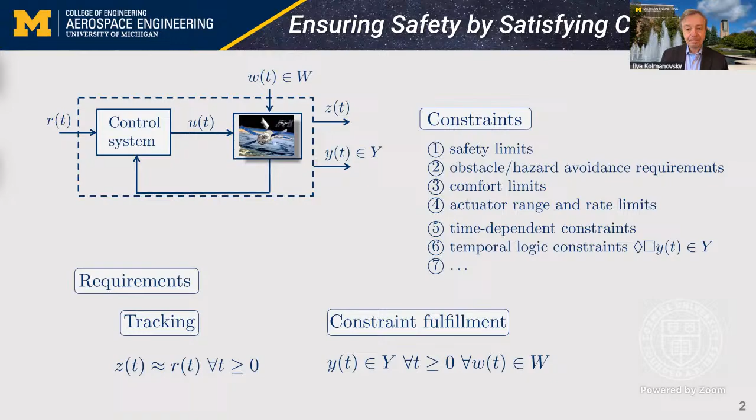When working on constraint control, what we're trying to accomplish is to avoid rollover for cars, trucks, and ships. We'd like to avoid compressor surge in aircraft engines, battery catching fire due to overheating, aircraft disintegrating during flight due to excessive structural loads induced by maneuvers or gusts, or the onset of pilot-induced oscillations due to exceeding actuator range and rate limits.

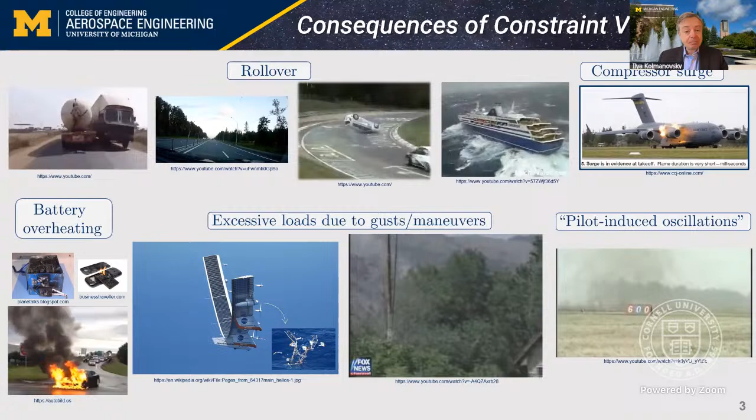So we want to avoid situations like this. How can constraint violation happen? It can happen in a number of different ways.

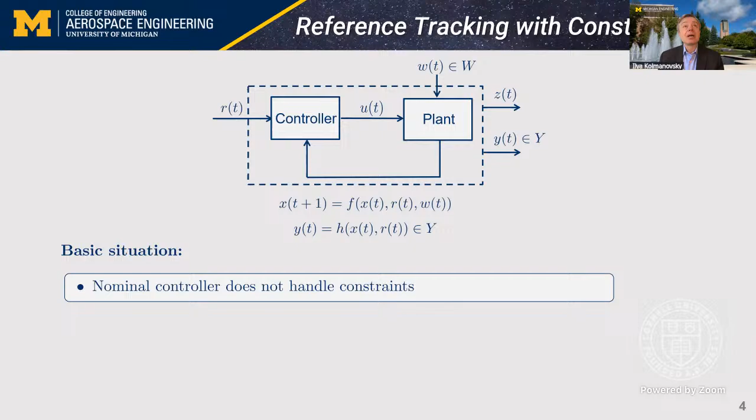One specific situation I've been interested in is when commands are issued to a nominal controller of the system by a human operator or a high-level planning algorithm, and these commands are unknown in advance. If the nominal controller is not designed to handle constraints, these commands can be unsafe, and as the controller responds to them, the constraints could become violated. That's a situation we'd like to try to prevent.

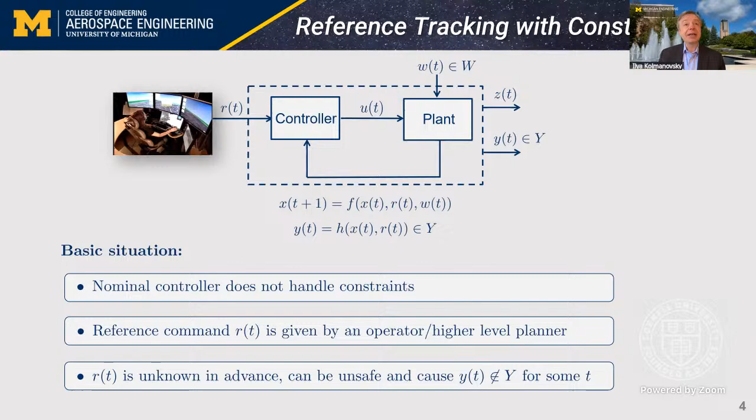Now a basic tool to address this issue is the notion of a safe set. That's something that one of my mentors, Professor Elmer Gilbert at the University of Michigan, introduced to me many years ago, and we have collaborated on extending these ideas to systems with unmeasured set-bounded disturbances, here denoted by W of t. Some of this research still continues to this day in my group.

A safe set, or what is more properly known as the maximum output admissible set, O infinity, is a set of all constant reference commands R of t, as well as initial states x of 0, for which the ensuing output response doesn't violate the constraints for all times, despite unmeasured disturbances or uncertainties W. In our work, we've been concerned about properties of these sets, such as invariance, how to compute and approximate them with suitable subsets, and how to use them in applications.

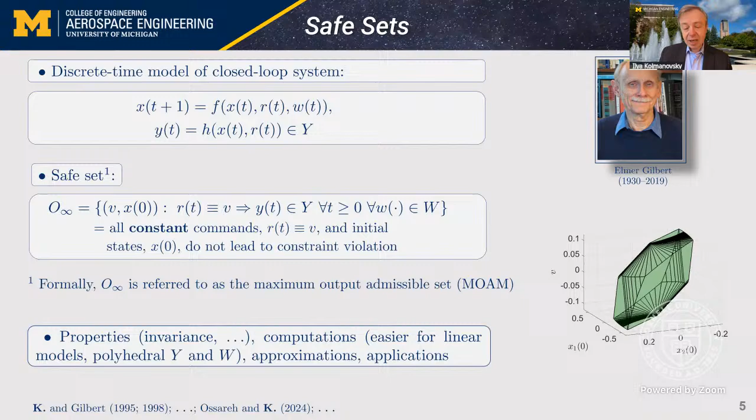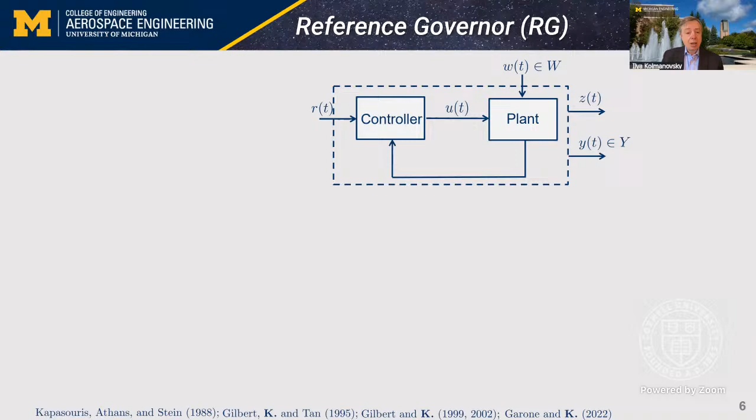One way to utilize safe sets to address the problem I just discussed is to use them for the implementation of what's known as a reference governor. The reference governor, the way to think about it, is a safety filter that minimally modifies unsafe reference commands R of t, which have the potential to induce constraint violation, into safe commands V of t.

To do that, what the reference governor needs to do is maintain the pair consisting of the modified command and a state within a subset of the maximal output admissible set, called P. There are particular reasons for using subsets. At the same time, you try to minimize the difference between the modified command and the original command, because ideally you'd like the safety filter to be inactive and not do anything.

Suboptimal implementations of the reference governor, such as a scalar reference governor, can be made computationally very fast and simple to implement. In the scalar case, the output of the reference governor is a linear interpolation between its previous output and the current reference command. Kappa is the adjustable interpolating factor, or bandwidth parameter. It takes values between 0 and 1, and you try to maximize it subject to the safety constraint. So this can be made very, very fast.

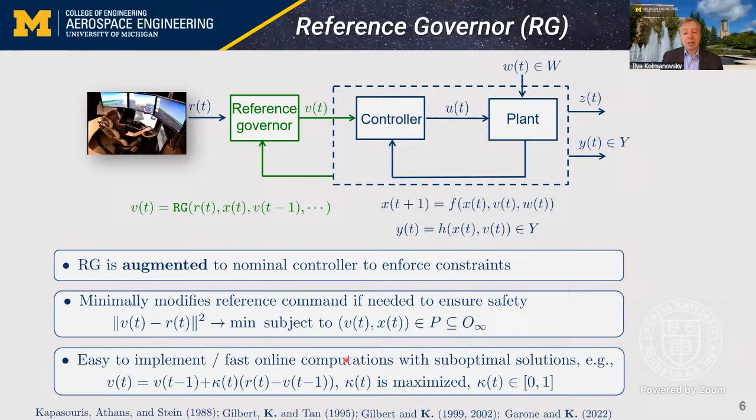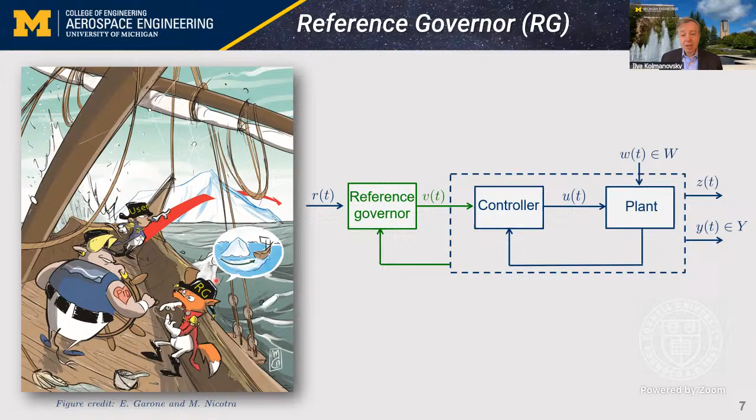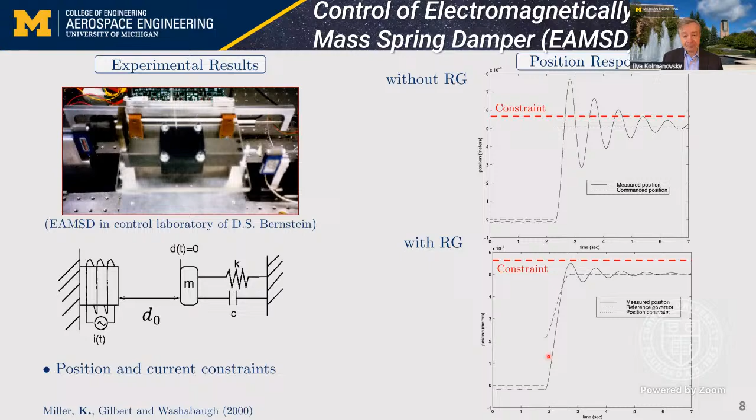You know you're getting older when there's an article in IEEE Control Systems magazine written about your paper in a rubric from 25 years ago. In this case it was about the paper reporting experimental results of the reference governor implementation for the electromagnetically actuated mass spring damper system I just talked about. Of course, we've learned a few things about reference governors since that time, and I'd like to summarize some of these ideas.

The key ingredient in construction of the reference governor is this set P. It turns out there is much flexibility in how this safe subset can be chosen. In particular, it has to be a subset of the maximal set, which ensures safety, but it does not need to be invariant. Invariance is really not required for this safe subset—it has to satisfy a weaker property, what we call strong returnability.

That is, if you start with a state inside this set and a reference inside this set, and apply the reference as a constant, the trajectory of the system might leave this set, but there will be some future time instant t prime where the trajectory passes through the interior of that set. Typically, we look for these subsets as zero sublevel sets of some continuous function, v tilde.

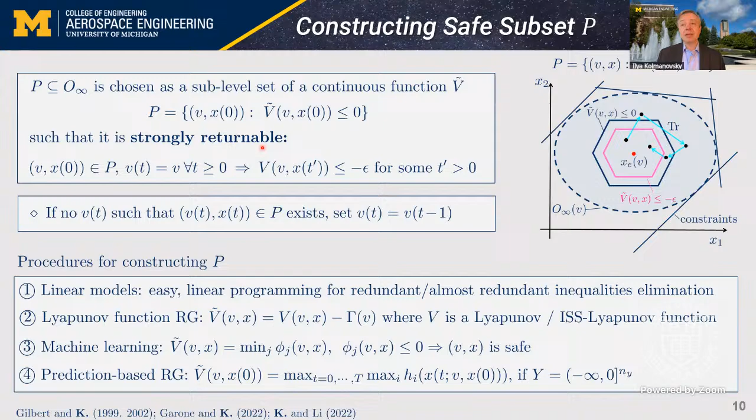Finally, you could avoid explicit construction of this set P altogether, and, like in model predictive control, use online prediction—basically an implicit characterization based on online prediction to define the function v tilde and this subset P.

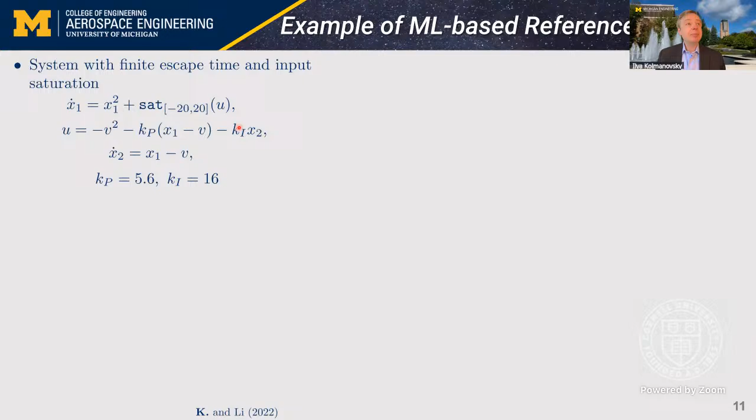Here's an example of a second order nonlinear system in continuous time, which can have a finite escape time due to this x1 squared term. The controller is proportional integral type. There is also saturation on the control input, and there is also a state constraint.

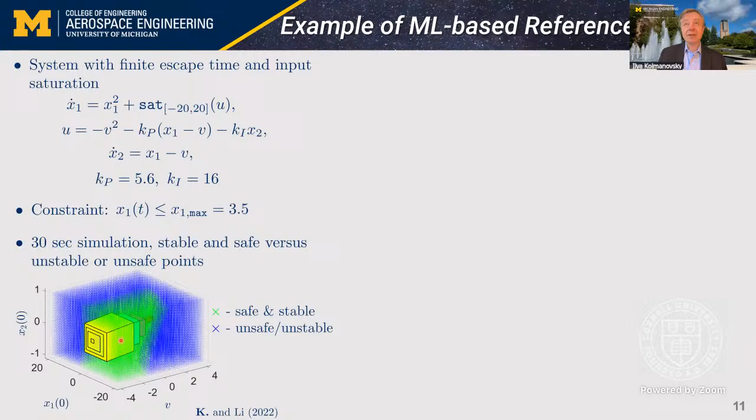To implement the reference governor, you can simulate this system for different pairs of reference command and states. Blue points are unsafe or unstable, and green points are safe and stable. You could fit a very simple classifier consisting of a union of 4 boxes into this green area. This defines the function v tilde, as shown here on the slide.

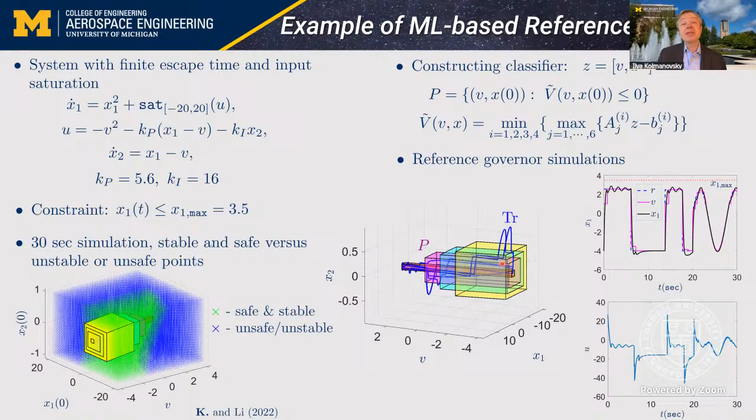That's enough to implement the reference governor. In particular, here we have this type of implementation working quite nicely, keeping the system away from violating the position constraint, satisfying input constraints, and avoiding the finite escape time. Note that this set P is not invariant, so trajectories can leave it and come back to it, but the safety is still preserved.

In fact, not only is the invariance of this safe subset P not needed, but when searching for the modified reference V, which should be as close as possible to our original command R of t, the exact solution of the optimization problem is not required. Any value V prime which satisfies an easy to check acceptance criterion can be used.

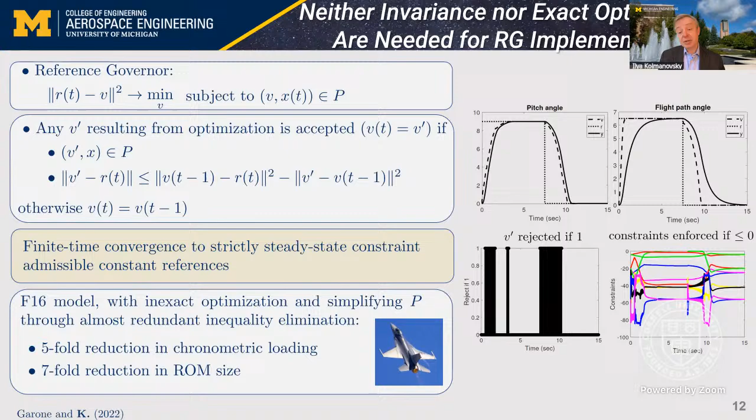So by exploiting simplified sets P, as well as inexact solutions to the optimization problem, one is able to obtain very simple implementations, from the perspective of chronometric loading and ROM size, that keep the system safe. Also, through this mechanism, reference governors can handle uncertainty in availability of computational resources if that becomes an issue.

So if you'd like to know a bit more about some of these approaches, my colleagues and I have written a couple of survey articles on reference governors. They discuss the underlying theory, over 20 extensions of the basic reference governor scheme I spoke about, and many applications in different domains. This work is really by multiple groups worldwide and multiple researchers who worked on these topics.

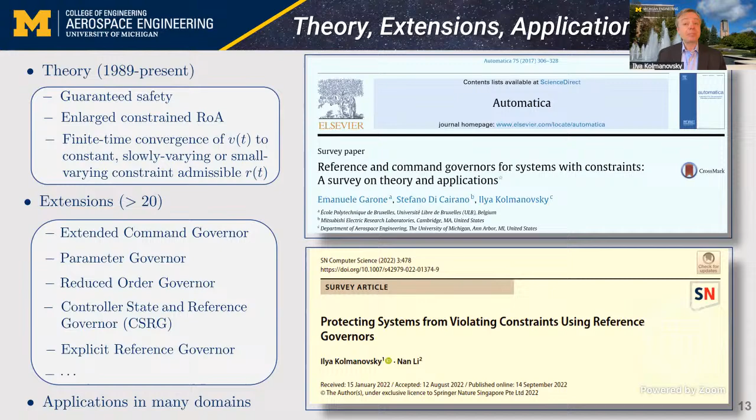I just wanted to mention very briefly a couple of recent applications of reference governors that we looked at not so long ago, and one of them is for vehicle lane keeping. So what you're trying to do is to keep the vehicle within the lane boundaries as it might perform some kind of lateral maneuvers. The idea here is to apply the reference governor to modify a lateral command for the vehicle where it wants to be in a lane.

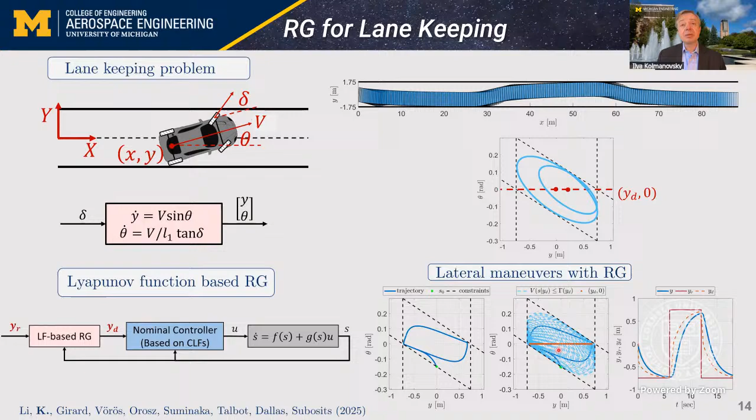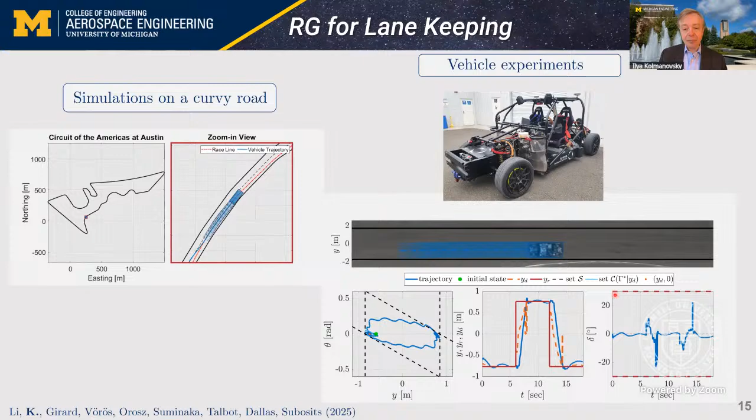Just to show briefly another application, we've looked at the use of these ideas in spacecraft applications, in particular for spacecraft rendezvous and docking maneuvers. One way to implement the reference governor in these applications is to have it output a virtual position of the chief spacecraft to which you are trying to dock. So instead of commanding the deputy spacecraft to approach the chief spacecraft, you command it to approach a virtual chief spacecraft, and then the reference governor gradually brings this virtual chief spacecraft to the real chief spacecraft.

How do you generate the position of the virtual chief spacecraft? One way to do it is to look at the trajectory of the orbit of the chief spacecraft and time shift it. For that reason, this reference governor is called a time shift governor, because we command the time shifted position of the chief and then gradually eliminate this time shift from the system.

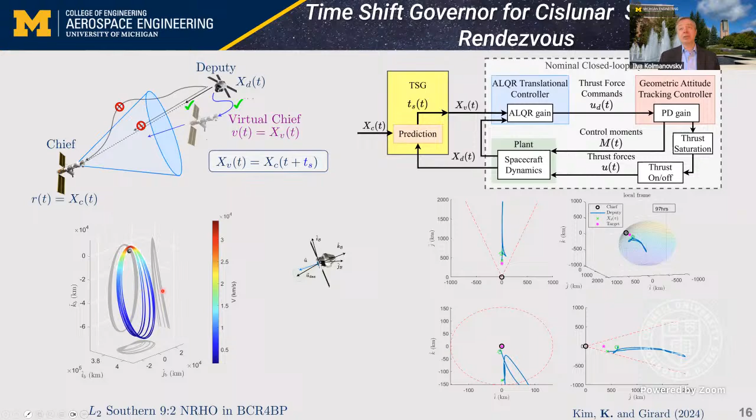Okay, so hopefully this is an introduction to reference governors.

One of the recent areas of interest in my group was how to develop reference governors for systems which have large uncertainty in dynamics. This uncertainty could come in dynamics, in operating environment, in constraints, and even in available computational resources. I've also been interested in cases where characterization of this uncertainty is poor, and less specific than in traditional robust and stochastic constraint control.

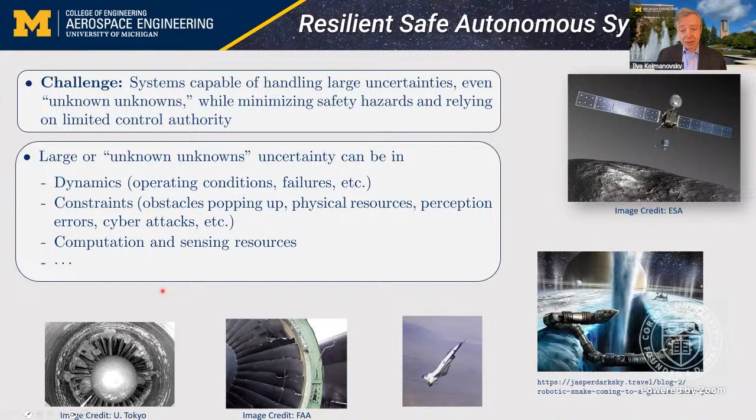We think that such reference governors can play a role in achieving resilient autonomy, in particular for aerospace applications. So how one can approach some of these systems with large uncertainty, and clearly closer integration of constraint control and adaptive control can play a role in addressing such problems.

Recently with Professor Pan Zhao and Naira Hovakimyan, we looked at integration of reference governors with L1 adaptive control. The basic idea is that the L1 adaptive control compensates for the uncertainty, so that from the perspective of the reference governor, the system behaves or matches the prescribed nominal model. So the reference governor really doesn't know much about uncertainty because the adaptive controller compensates for it.

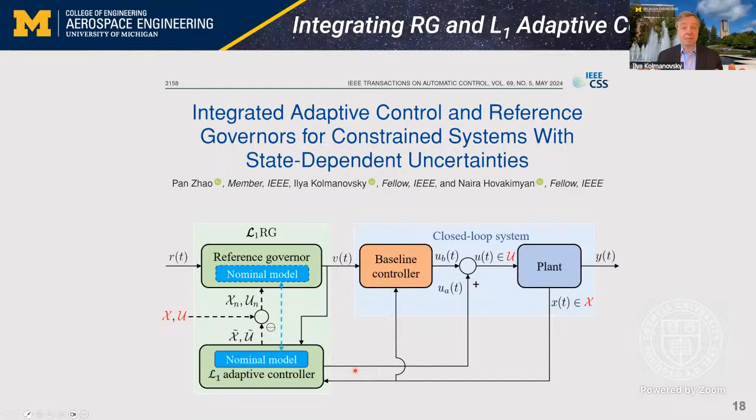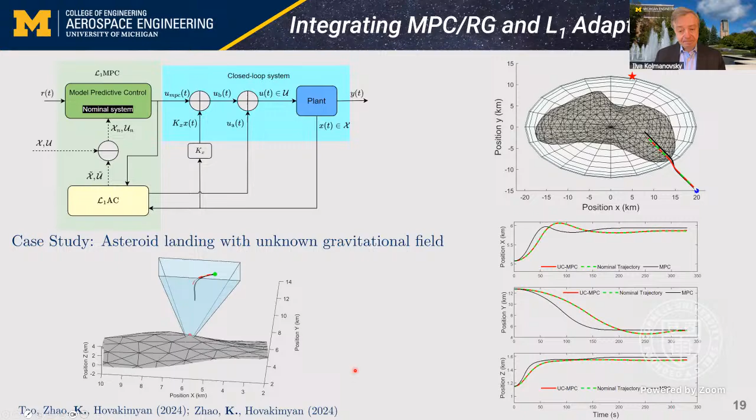Now, here's another approach, how we can integrate learning into reference governor. Suppose we have a system that underwent a change. For example, we had a truck, and that truck has been loaded, so its center of gravity has changed. Maybe we had an aircraft and a portion of the wing of the aircraft has fallen off, a more extreme scenario.

Let's suppose that somehow the system is stable with the nominal controller, but we are not sure which commands are safe and which can cause constraint violation. So what can we do in such case? What we can do is take the system to the side and experiment with it, applying different piecewise constant command profiles. We can see how the system responds, and we can try to estimate from those data a safe subset P that we need for the implementation of the reference governor.

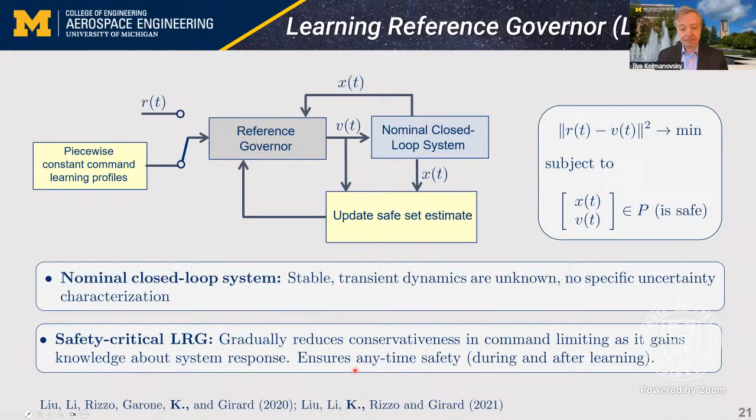The idea would be that as learning proceeds, the conservatism in limiting the reference command will be reduced as the reference governor gains more knowledge about the system response. Of course, we are interested in ensuring anytime safety with such approaches, both during the learning phase and once learning has been completed. Now, how to actually design and implement such a safety critical reference governor?

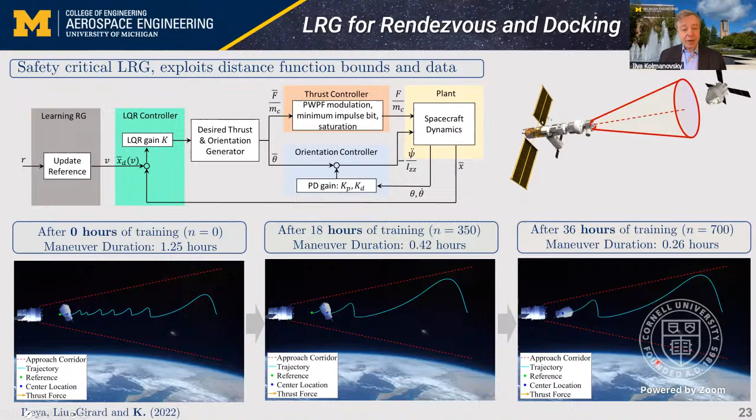Here's a safety-critical learning reference governor developed using these ideas, applied to spacecraft docking maneuvers. As learning proceeds, the maneuver becomes more aggressive and shorter in time duration. So as we learn more, the maneuver lasts less time and approaches closer to the constraint boundary, shown here by these dashed red lines, which represent a line-of-sight cone constraint that we worry about.

Here's another example where we apply a learning reference governor to rollover avoidance, done for a truck. This truck has been loaded or modified in some way in the field, so the center of gravity has changed, and if it proceeds on the mission without a reference governor, it could roll over. So what we can do is let the learning reference governor modify the steering angle and enforce the constraint on load transfer ratio to prevent the rollover.

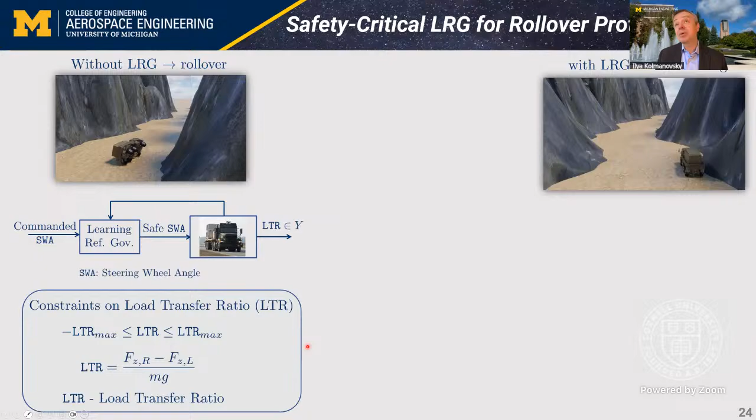Before learning, when we just operate with a priori bounds that are very conservative, the reference governor is very conservative, and as a result the vehicle is not able to follow the desired maneuver during the mission.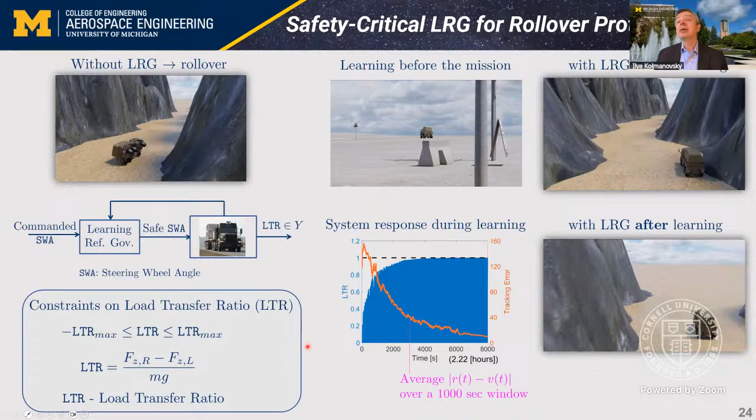What we can do is take this vehicle to the side and experiment a bit, applying different steering commands. After learning for a while, we're now able to do significantly more aggressive maneuvers, and in fact able to complete our original mission and perform the maneuver safely without violating the constraints.

I won't talk about details, but you can make this scenario a bit more challenging, assuming you have a vehicle with fuel slosh. The dynamics are more complicated, but through learning you can also enforce the constraints on load transfer ratio and prevent such a truck from rolling over.

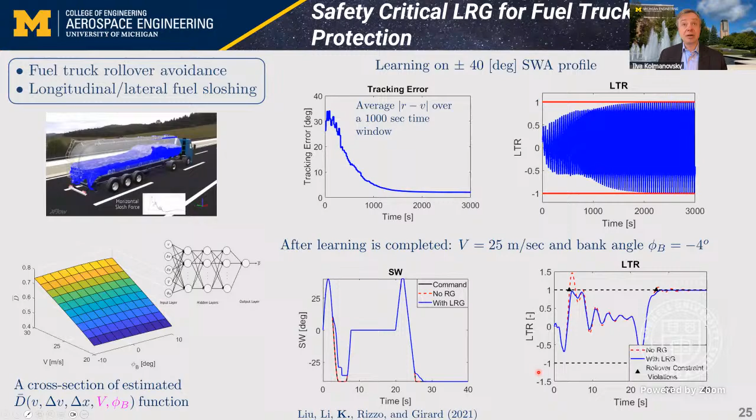Now, one of the limitations of the learning reference governor as I've just described is relatively slow learning. It takes multiple experiments to collect enough data to characterize the subset P that we need. So more recently, we've looked at ways of addressing this.

Conventionally, when collecting the data set, for each step applied to the system we record the state at the beginning of the step, x of t, then the reference v of t, and then the peak. So one step would yield basically one data point. But of course, all states as you move along the trajectory before the peak occurs are going to have the same peak. So in fact, from a single trajectory, you can easily collect multiple state-reference-command-and-peak triples, and a single step yields multiple data points.

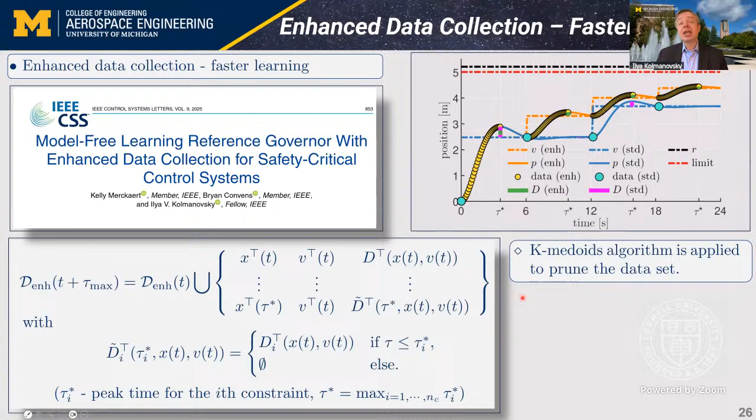This is what we call enhanced data collection, and now we collect all the data using this idea. The data set grows quite large, but we can apply data pruning algorithms to eliminate some of the data points and keep it within the memory size we have available.

Here's an example of a spacecraft with a flexible appendage, where as you command reorientation to the spacecraft, you want to keep the orientation, appendage deflections, and control input within the prescribed limits.

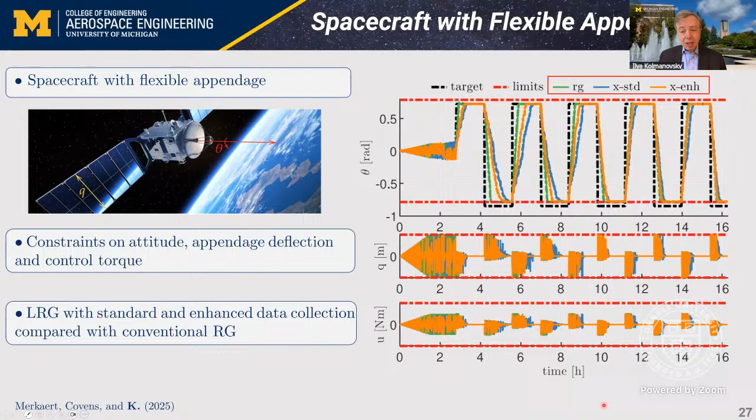Another recent extension is to the case where this learning reference governor only uses output measurements rather than full state. This extension is important if one wishes to apply learning reference governor directly to black box systems where you don't know the states but can take certain sensor measurements. The trick is to use delayed values of the output as a surrogate for the state vector, and then proceed with the rest of the construction using this trick. The details are in the paper I've just shown.

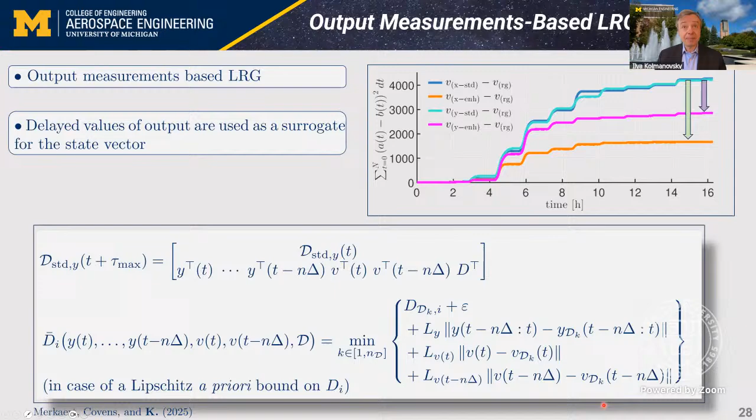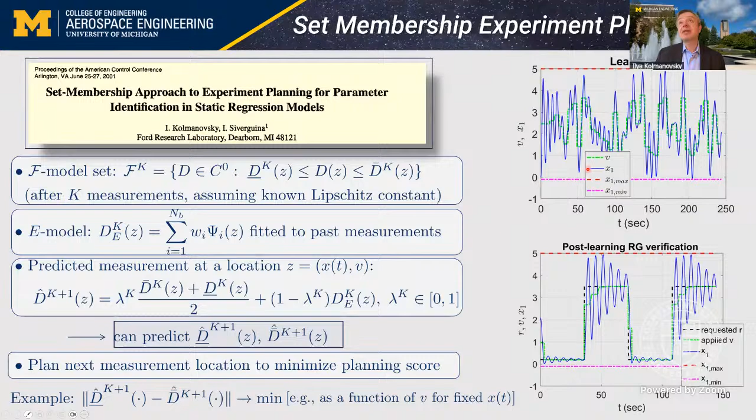Another opportunity is to optimize the sequence of steps applied to the system—the actual sequence of step responses we go through. This is an experiment planning problem, and there are different techniques you can employ. Interestingly, we looked back 25 years ago and found a paper we wrote on set membership experiment planning for Lipschitz models. We think this learning reference governor setting nicely fits into this framework, and some of our initial simulation results seem quite promising in terms of designing exactly the sequence of steps we have to go through to learn faster.

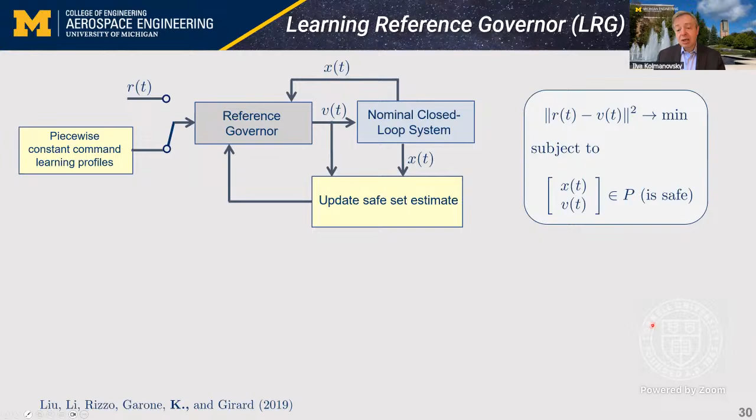This is the safety critical learning reference governor I spoke about. I wanted to briefly mention a non-safety critical version as well. It operates a bit differently: it starts with no or little command limiting, then tightens a safe set in response to constraint violations during learning. So this learning reference governor does violate constraints during learning—in fact, it learns from constraint violation. It's not going to be safe during the learning phase, but hopefully after learning is completed, it's safe or close to being safe.

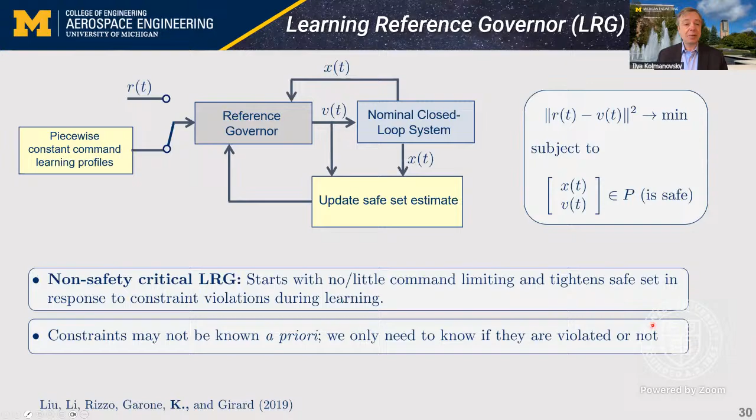Interestingly, in this case, constraints may not be known a priori—we only need to know if they are violated or not. Just very briefly, to show one example: these are truck simulations, and what we are trying to do is have the vehicle learn not to roll over with this non-safety critical learning reference governor.

Each time a constraint violation happens on load transfer ratio, we tighten the safe set description—essentially we reduce this gamma of V. There's a specific way we do it so that after multiple learning iterations, we are able to avoid rollover. Of course, in practice, if you use such an approach, you have to make sure constraint violations are not catastrophic. For example, in a real vehicle application, you might add sidebars to the vehicle to ensure actual rollover doesn't happen.

For this type of non-safety critical LRG, you'd deploy it or have it learn in the virtual world rather than the actual physical world.

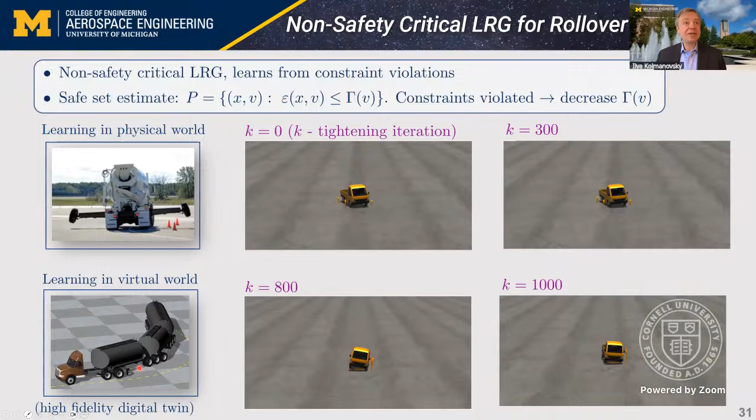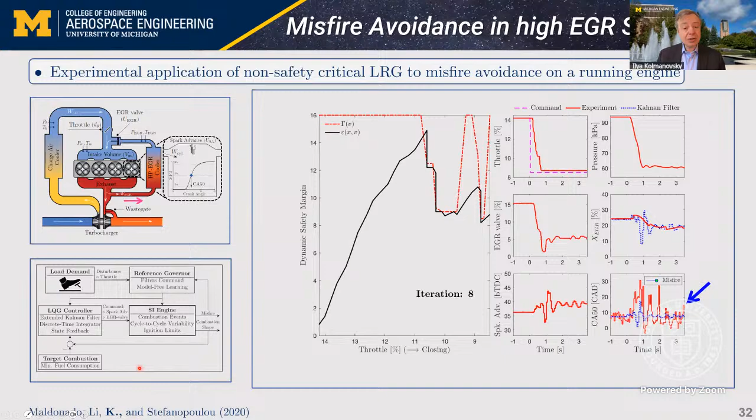We've actually tested such schemes experimentally, in joint work with Professor Anna Stefanopoulou at Michigan and our students. In that case, we had a non-safety critical version of learning reference governor on a running gasoline engine with a high exhaust gas recirculation rate—essential to reduce oxides of nitrogen emissions. Here, the learning reference governor learns to slow down throttle closure in such a way as to leave enough air in the intake for acceptable combustion to take place, essentially avoiding engine misfires. That was an interesting experimental application.

I'd like now to shift the discussion a bit and talk about what I would call constrained learning. Traditionally, when we deal with uncertain systems, we assume dynamics or environment are unknown, but constraints themselves are specified—given to us by some known functions or known limits. Turns out that's not quite true in applications, as in some cases constraints themselves are not a priori characterized, at least functionally. So these constraints also have to be learned.

We encountered such a situation about 25 years ago when working on stratified charge combustion engines, where fuel is directly injected into the combustion chamber and has to swirl around and reach the location of the spark exactly at the right moment for acceptable combustion to proceed.

There is an intricate relation between injection timing, when you inject fuel, and spark timing, when you actually start the flame. So there are constraints, and these constraints depend on air-fuel ratio of the engine, exhaust gas recirculation (EGR) rate, and rail pressure. It's actually quite a complex function. At that time, we looked at support vector machine learning to determine the constraint boundaries from the data and obtain a functional description of those constraints.

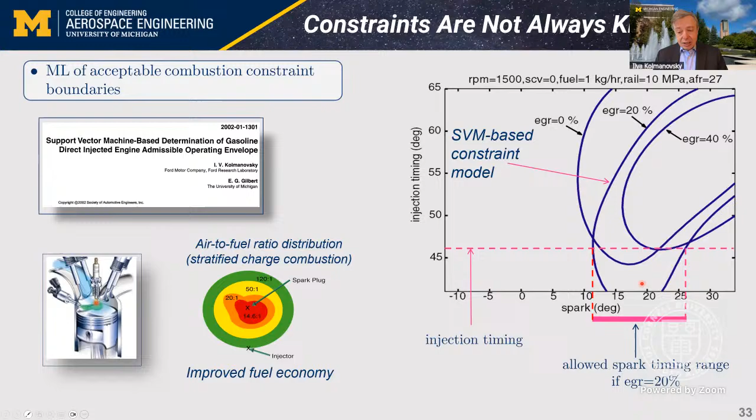It turns out we came back to the same kind of issues more recently, realizing that even if you take a simple two-link robotic manipulator and throw a couple of obstacles into a workspace, if you look at configuration variables, which are joint angles of this robot, the collision-free space actually has quite complex geometry, and the constraints are quite complicated and not that easy to specify in general.

So what you can do is throw a few points in and sample, see whether these points lie in collision-free space or in parts of the space where you have collisions, and train support vector machine classifiers to provide a functional description of the constraints. You can then use this for constraint control, for example in model predictive control and in reference governor design as well.

What's very interesting is that we found that for a number of kernels in support vector machines, in particular the Gaussian RBF kernel, the MPC problem you end up with reduces to what's known in the literature as a difference of convex, or DC, programming problem, for which there are tailored solvers. So it's a known class of optimization problems for which tailored and computationally efficient solvers exist.

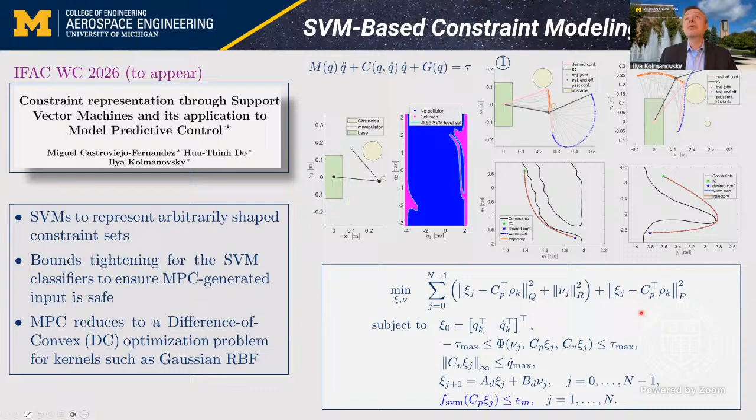With that, you're able to solve MPC problems and perform various maneuvers with this manipulator, where you have to move it, for example, from the stretched position to a more folded position, while avoiding obstacle hits and so on. So there are some interesting applications where you want to learn the constraints offline.

Now, the other class of situations where constraints are not known is where you need to do online constraint learning. For example, you might have a robot that enters an area, perhaps a room where the walls are not known precisely and have not been a priori characterized. Perhaps you have some kind of functional description of them, parameterized by a few parameters.

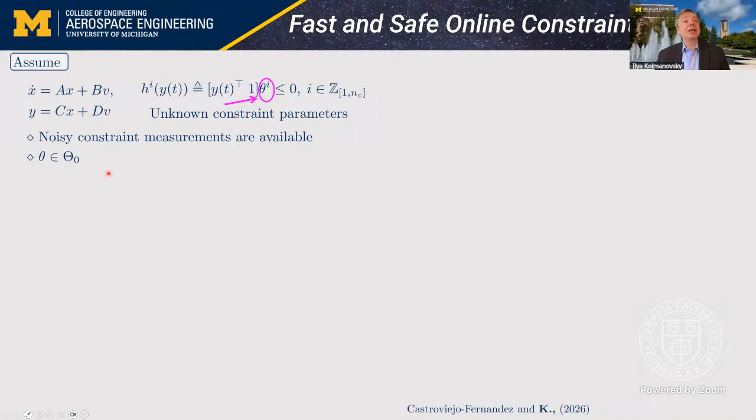So what you try to do is operate safely within that area, within that room, while relying on measurements of the constraints to try to identify what the parameters in the constraint descriptions are. You need to know some a priori bounds on where the parameters can be. Then in terms of identification of the constraints, there's really one type of approach you can use, which is a set membership-based approach.

Experiment planning, because you want to plan your position within this room safely but also optimally, to enhance the data collection and try to reduce the uncertainty in the parameter set you're trying to identify. Then the reference governor at each epoch ensures that whatever reference you command is safe with respect to your current estimate of the plausible parameter set.

But as learning progresses, the size of this theta sub k, the set of plausible parameters, reduces, and therefore the set of feasible reference commands that you can follow expands. So initially you could be very conservative in terms of which maneuvers you can perform, and then once you proceed with learning, you can become significantly more aggressive and explore more space.

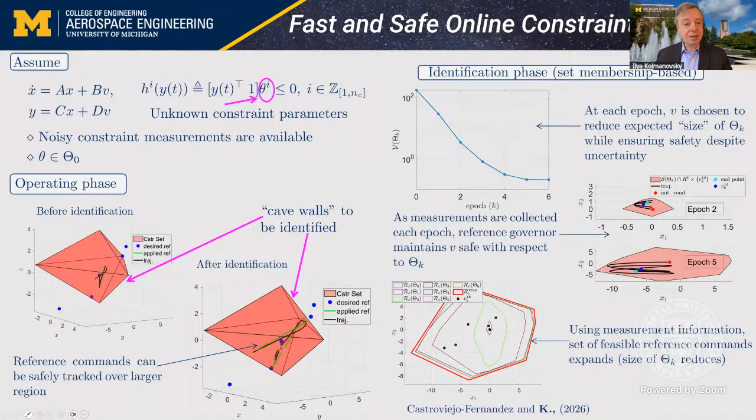If I have a few more minutes, I'd like to tell you a little bit about the model predictive control research going on in my group, moving away from reference governors and thinking about more general schemes for dealing with constraints.

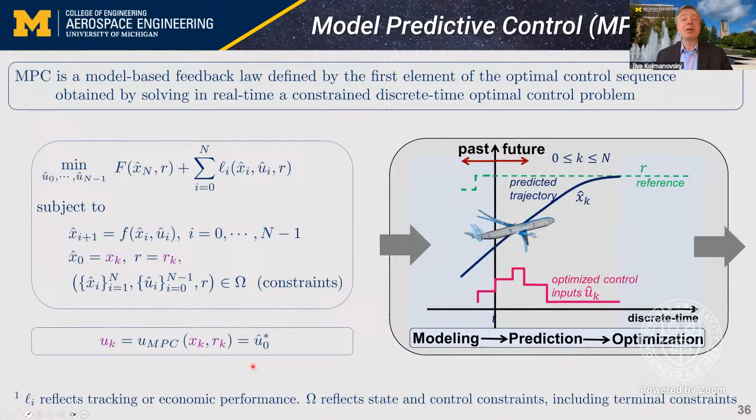As a reminder, in MPC we tend to solve an optimization problem, typically a trajectory optimization problem subject to constraints. We use the first element of the optimal control sequence for control, and then we recompute the solution. Now, of course, one of the key challenges, or Achilles' heel, of MPC is the heavy computations involved.

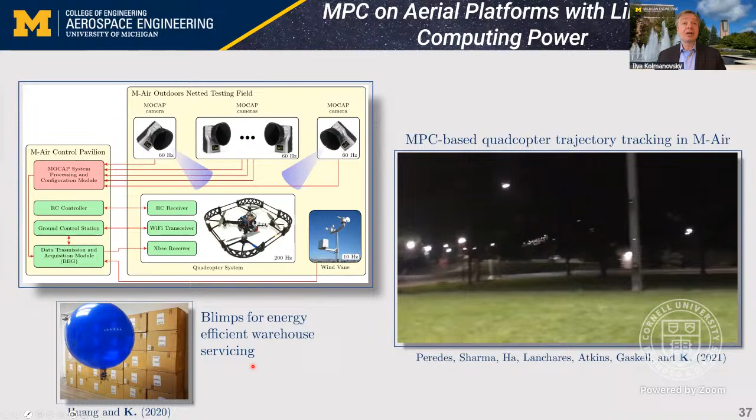If you try to implement MPC controllers on, for example, board of quadcopters or small aerial vehicles, you realize we've been trying to think of ways to augment reference governor type schemes with model predictive controllers to have computationally simple, safe, and effective solutions. A couple of ideas we came up with: one is what we call the multi-fidelity reference governor MPC scheme.

The idea here is that MPC and reference governors use different fidelity models. MPC uses a low-order, disturbance-free, typically linear model, and only enforces input constraints, so its trajectory optimization problem is very simple. The reference governor, on the other hand, uses a high-fidelity, nonlinear model. It also uses disturbance bounds for uncertainty, predicts trajectories, and decides on modified reference safety. It enforces state constraints. So MPC does simple optimization, and the reference governor validates the trajectories generated by MPC and decides if it can advance to them or not.

That's the setting we've studied, and some of the theoretical details are in our papers. Here's an example where we're trying to dock to a rotating spacecraft. The MPC uses a low-order linearized model with 12 states, and the reference governor is able to use a high-fidelity model with 20 states that accounts for rotational dynamics in addition to translational dynamics, and that model is nonlinear.

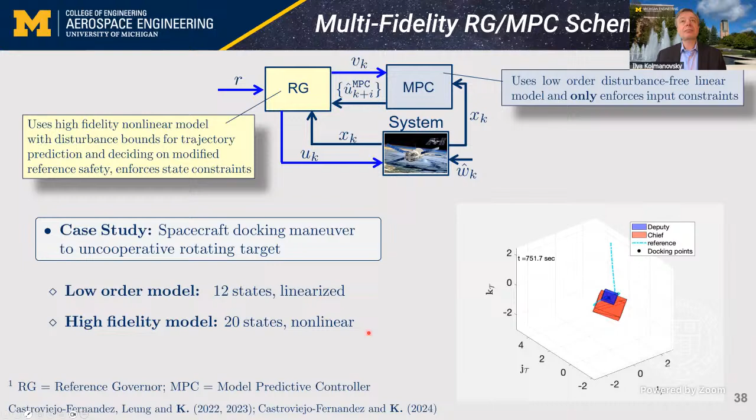Another idea we looked at is what we call the computational governor. This idea came from looking at situations where the MPC solver needs a lot of iterations to converge. If the system you're controlling with model predictive control is close to steady state and you use warm starting, then the MPC solution from the previous iteration isn't so different from the optimal solution, and typically one iteration per time step is sufficient for convergence.

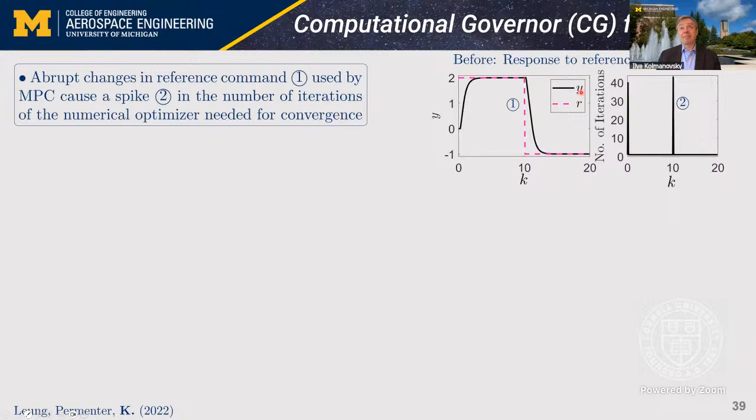The spike in the number of iterations, which you see here on the plot, occurs when the problem data changes—for example, when there's a drastic change in the reference command R for Y. So the idea is pretty clear: instead of applying this pink step, you use some form of reference governor to replace it with a smaller step and perhaps a ramp. If you do it the right way, maybe you could achieve convergence of the optimizer within one iteration.

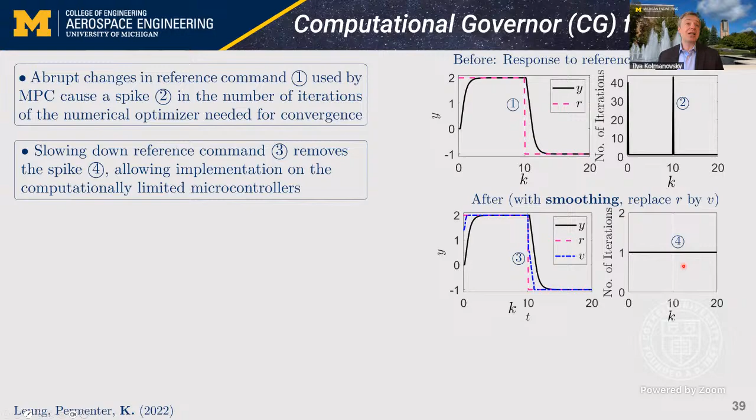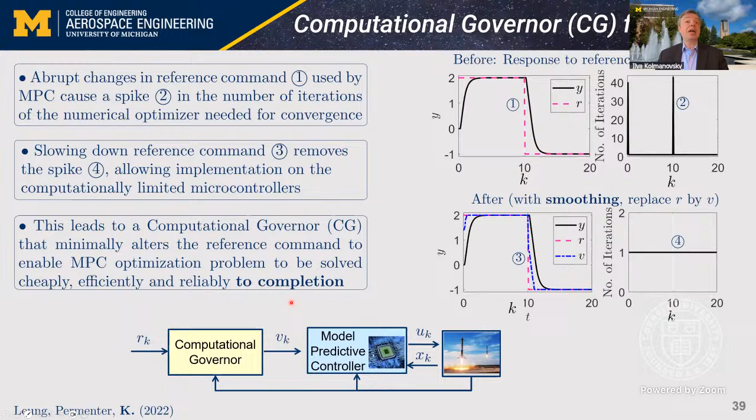That's precisely the idea of the computational governor: it minimally alters the reference command to enable the MPC optimization problem to be solved cheaply, efficiently, and reliably to completion. I won't go through all the details, but I'll mention this reference governor—the computational governor—is a scalar reference governor, but the constraint it enforces doesn't exist in the physical domain, but within the optimization algorithm. There's a Newton step in the interior point method we use to solve the underlying quadratic programming problem, and we try to limit that step to a value of 1 in terms of infinity norm.

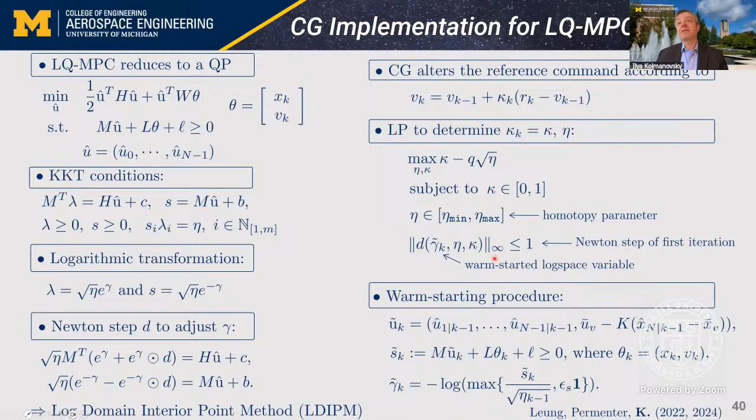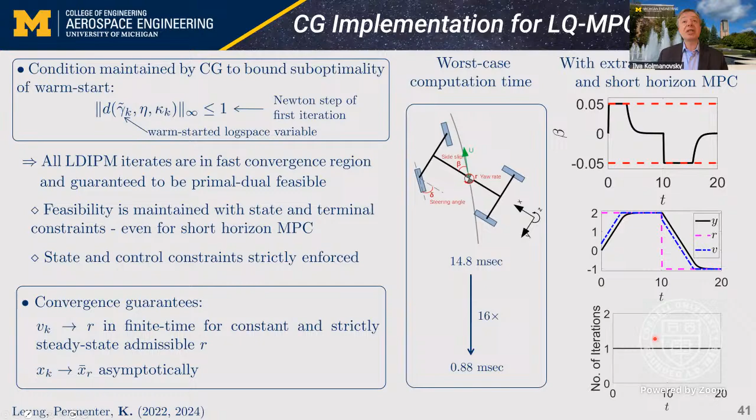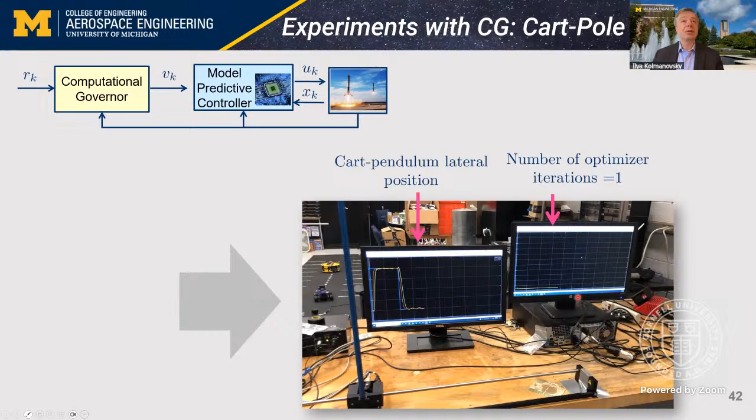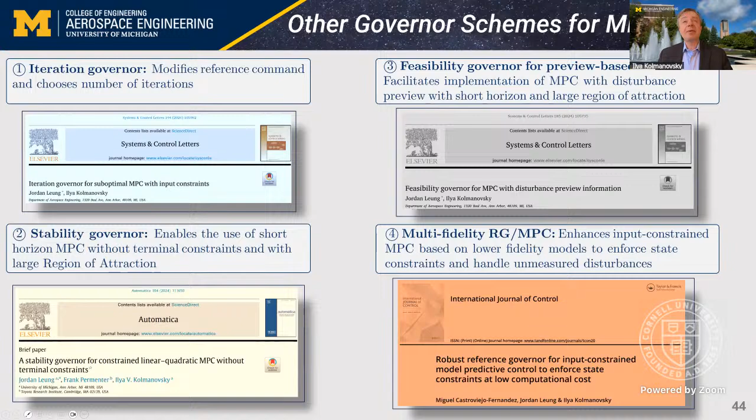It turns out that the solution inspired by our computational governor has actually been implemented by Toyota Motor Corporation in production. I'll skip that, and just mention that developing other governor supervisory schemes for model predictive control represents a nice opportunity for continuing research. We've been pursuing several extensions of these ideas, and I'd be happy to speak more offline if there's interest.

I spoke about the learning reference governor. We also look at a couple of other schemes and approaches for ensuring safety with reinforcement learning controllers, as well as with controllers based on machine learning type perception. Again, in the interest of time, I'll skip that.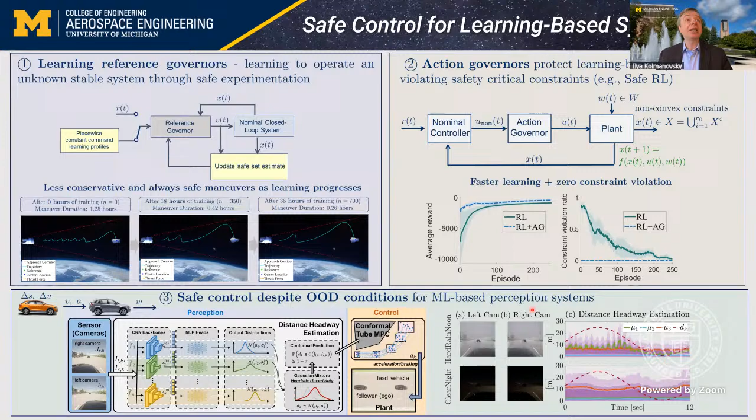This is my last slide, just to summarize some of the discussion and a few closing thoughts. The reference governors I talked about are add-on safety filters. They apply to the reference command to enforce state and control safety constraints. Hopefully, as I've convinced you, learning can be integrated into reference governor design to handle unknown but stable system dynamics without relying on overly specific or restrictive assumptions on the uncertainty model.

Practical constraints can be complex, and if a priori unknown, they may need to be modeled from data using machine learning techniques, or they may have to be learned online. Finally, supervisory schemes for MPC can be developed that improve reliability of MPC with short horizon, reducing computational time, and expanding the closed-loop region of attraction. Some ongoing research is to integrate learning into such supervisory schemes intended for integration with MPC controllers as well. And that completes my talk.

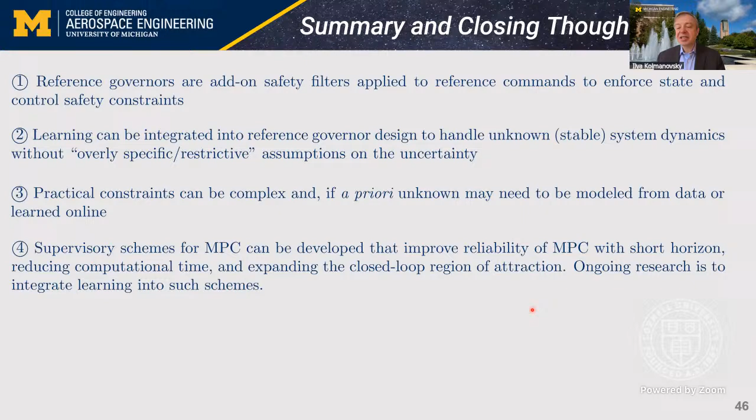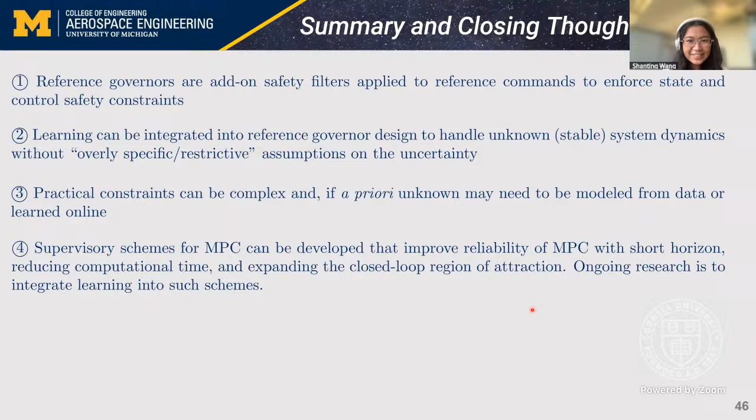Thank you so much for the invitation. It was a pleasure to be here. Bye-bye.